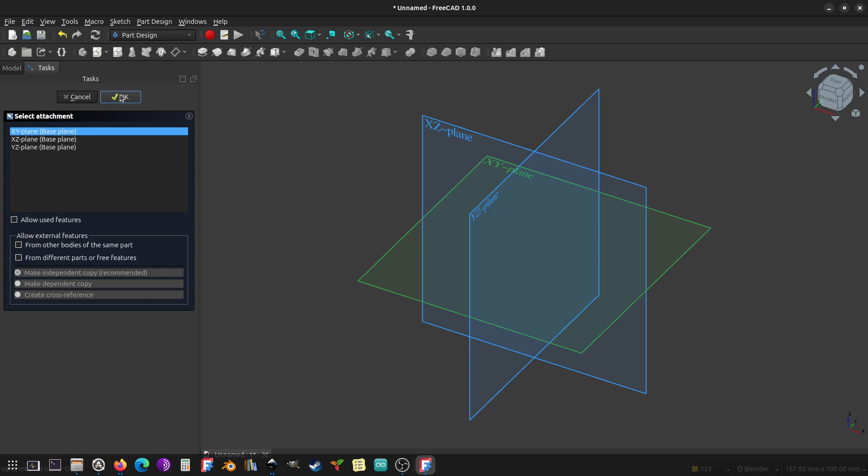In this build along tutorial, we'll be building a bracket for the speed sensor for the SparkBot. After you've got FreeCAD open, begin by creating a new part in the part design workbench. Then in the tasks tab, create a new body, create a sketch, and we're going to do that on the XY plane. Click OK, and we're now in the Sketcher workbench.

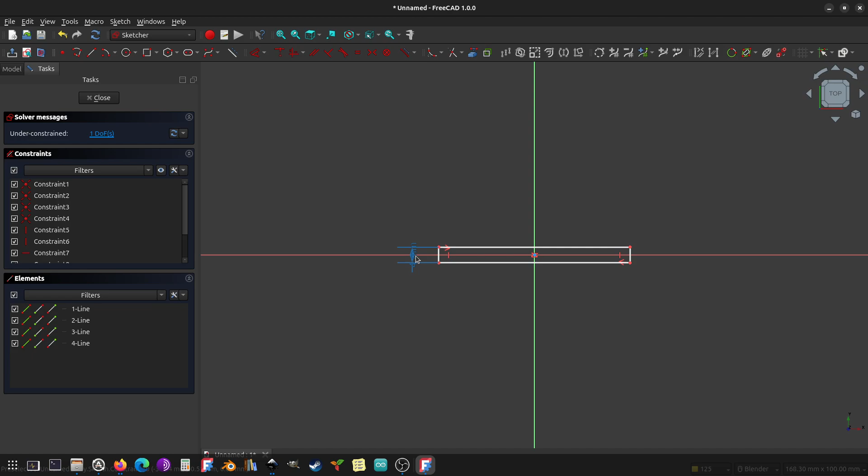We're going to create a new rectangle, and we'll do that symmetric around the origin. We'll do that by clicking on the top left corner of the square, the bottom right hand corner of the square, clicking on the origin, and clicking on the constraint symmetric tool. We're going to make the height of this square 4 millimeters high, and we're going to set the length of this square to 32 millimeters.

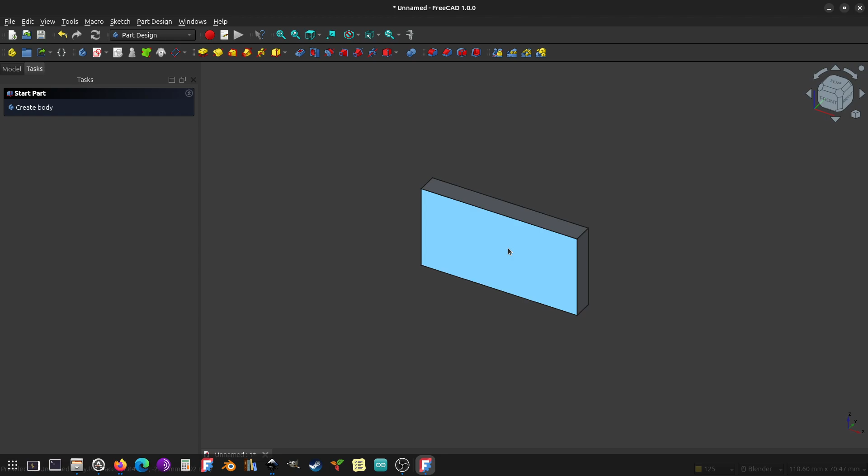Our sketch is fully constrained, so we can close out of the Sketcher workbench. And we're going to pad this sketch out to 17 millimeters. The next thing that we need to do is create a couple of holes for the speed sensor. So we'll do that by clicking on the front face of our block and clicking on Create Sketch. We're going to create 2 holes. So grab the Create Circle tool and just create 2 circles.

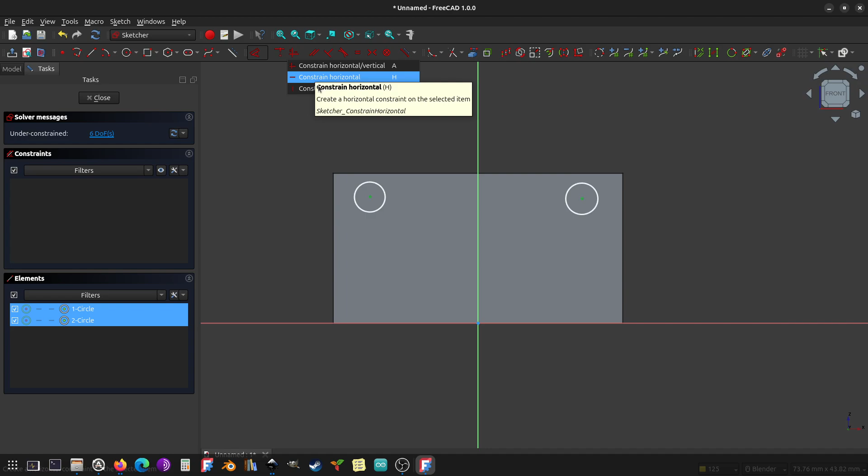And we're going to constrain both of these circles to the same plane. So left click in the center of both circles and come up to the constrain horizontal tool, and now both circles are locked to the same horizontal plane.

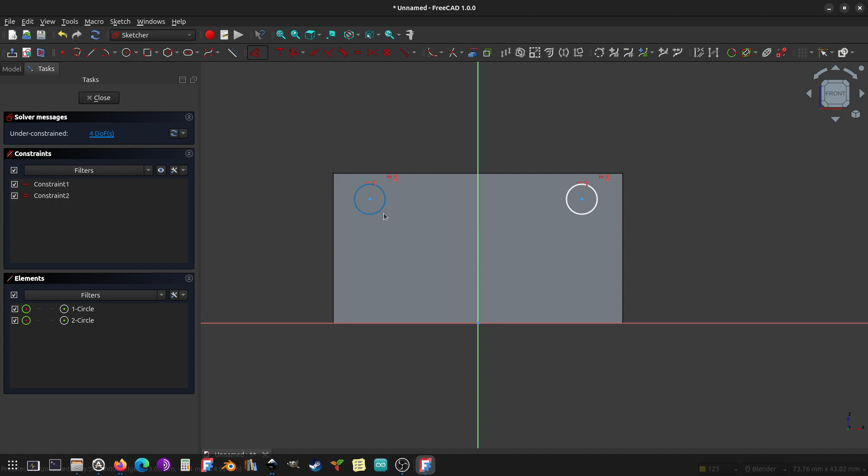We're going to set the diameters of both circles to be equal, so left click on the outside edge of both circles and then click the constrain equal tool, and then left click on one of the circles, and we're going to constrain the diameter to 3.2 millimeters. We're using 3 millimeter bolts to hold the speed sensor onto this bracket, and so 3.2 millimeters gives clearance for the threads on this bolt.

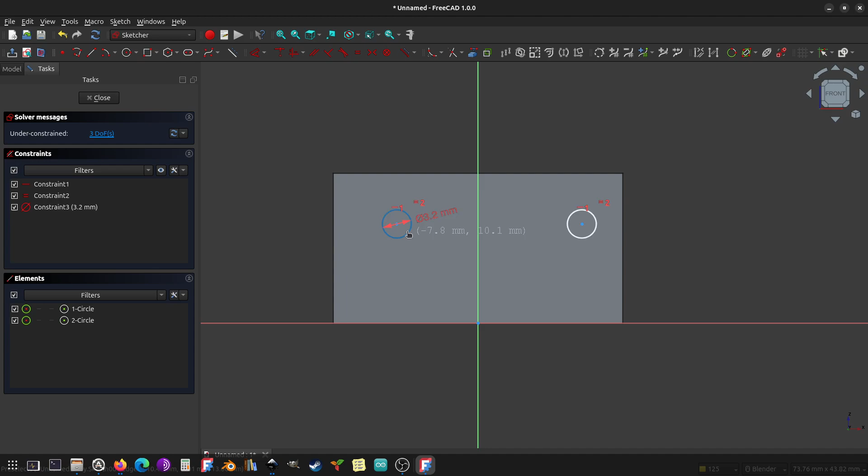We need to lock these circles into place on this block. Before we do that, though, we do need to set the distance between these circles. So we're going to left click in the center of both circles, and then we will constrain the horizontal distance between them to 21 millimeters.

And now we're going to lock these circles into place with respect to the top edge of this block. So we're going to use the Create External Geometry tool, and we're going to click on the top edge of this block. This gives us a line segment that we can reference now. Left click in the center of the left circle, left click on the edge of the line segment, and we're going to constrain the horizontal distance to 5.5 millimeters.

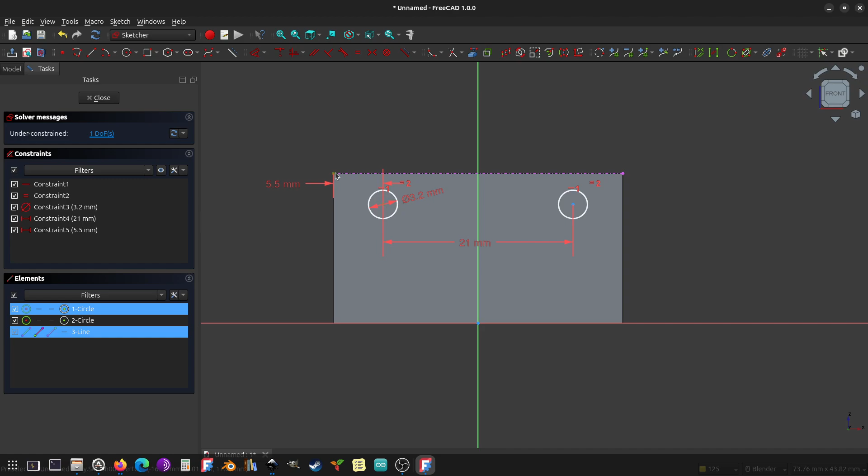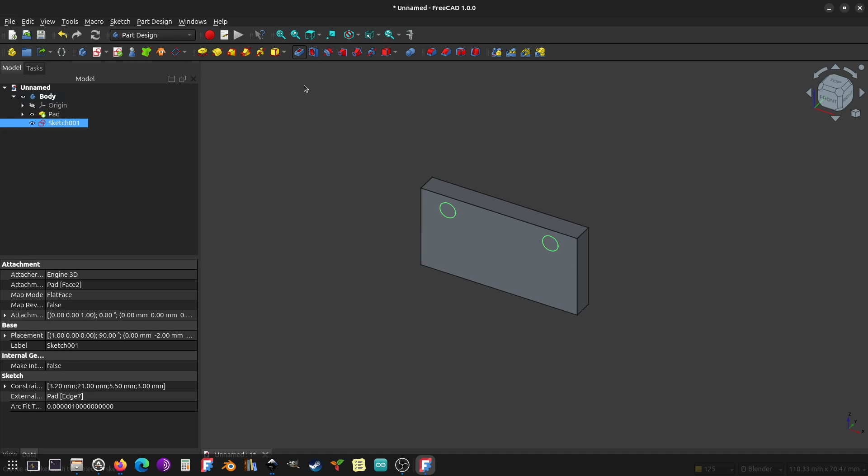And we're going to constrain the distance from the center of the circle to the top of the block by left clicking in the center and left clicking the end of the line segment. We will set that distance to 3 millimeters. So now that our sketch is fully constrained, we can close out of the Sketcher workbench. We are going to create pockets, so make sure that you're clicked on that sketch. Create pocket. It's a 4 millimeter thick part, so 5 millimeters clears the part, no problem.

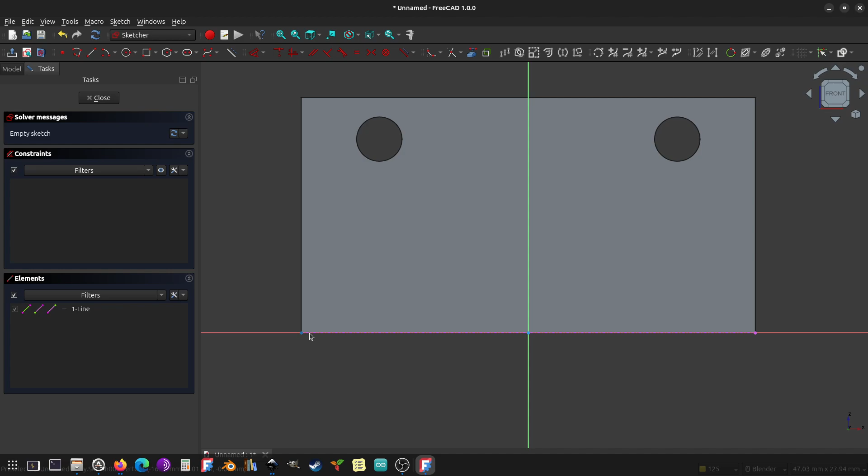And the next thing that we're going to do is create a step on the front of our block. So left click on the front face and click on Create Sketch. Now that we're back in the Sketcher workbench, we're going to reference the bottom edge of this block. So grab the External Geometry Reference tool, click the bottom edge of the block, and you will see when you hover over it, this dotted line indicating that we've referenced the bottom edge.

Now I'm going to grab the Create Rectangle tool, and I'm just going to drag out a rectangle at the bottom. I'm going to constrain this rectangle so that it is linked to the bottom edge of this block. So I'm going to click in the bottom left-hand corner of the square, click on the left-hand edge of that line segment, and I will constrain coincident there.

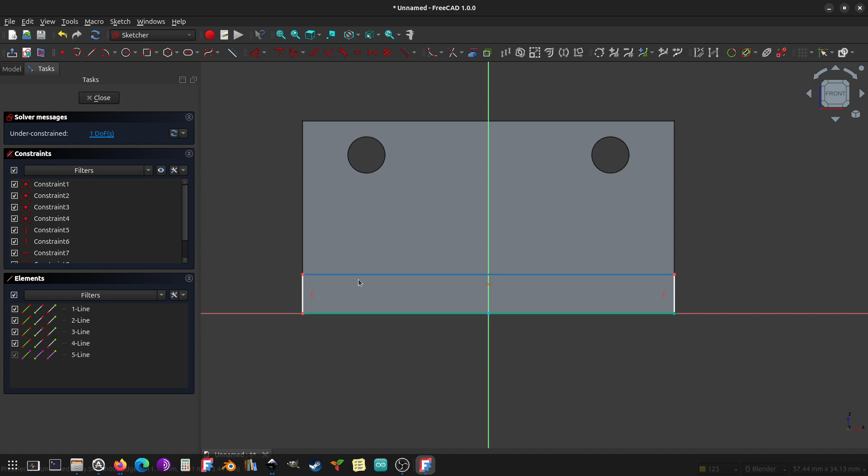And similarly, on the bottom right-hand corner of the square, I'll select that vertex, I'll click on the right-hand edge of that line segment, and I'll constrain coincident. So now our rectangle is locked to the bottom of our block. And the last thing that we're going to do is set the height of this rectangle to 8 millimeters.

We're fully constrained, so we can close out of the Sketcher workbench. Let's pad this sketch out to 6 millimeters. And now we're going to add some cosmetic touches to this block. I'm going to fillet the top edge of the block and the edge of the step that we just created.

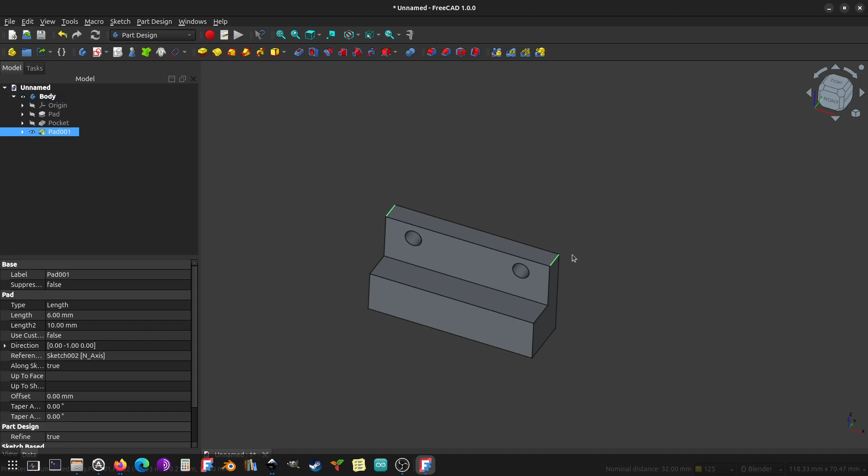Start with the top edge of the block. So click on that left edge there, hold down the control key on your keyboard, left click on the right edge. You now have two edges selected, and we're going to grab the fillet tool and we'll give it a 4mm fillet. We're going to do the same thing with the bottom edge of the step here. So left click on that bottom edge there, hold down the control key, left click on the right edge, and we'll fillet it with a 4mm fillet.

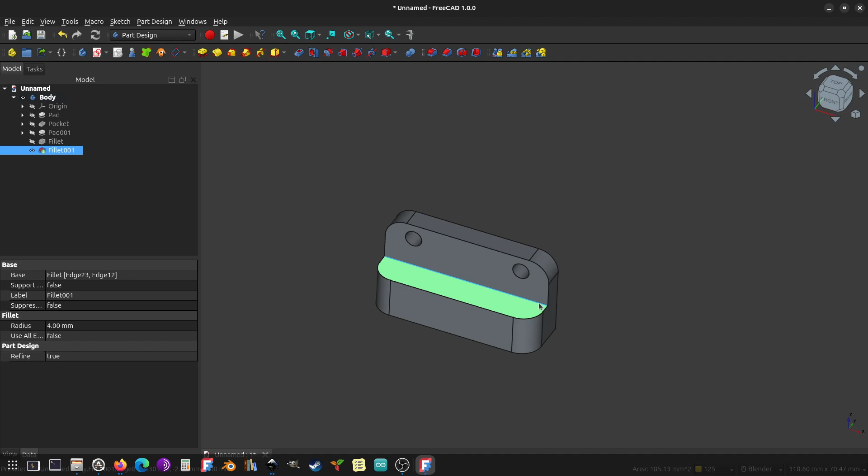Okay, now we need to create two through holes on this step so that the bracket can be screwed down to the SparkBot base platform. So we're going to click on the top of that step and we're going to create a new sketch. And we're going to reference the bottom edge of the step here in this view. So grab the external geometry reference tool, click on that bottom edge, and you will get that referenced line segment.

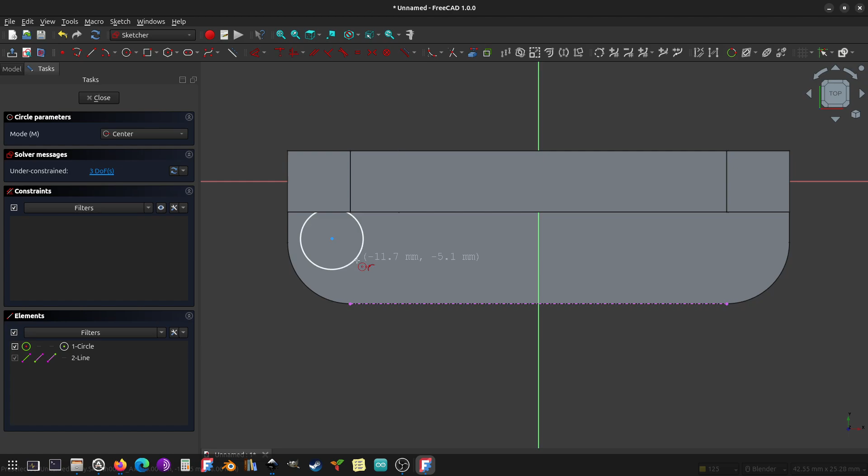We're going to create two holes. So create two circles. As we've done previously, we're going to click in the center of both these circles and we're going to constrain them to the same horizontal plane, so they both move in tandem. And this time we're not going to set a distance between these two circles because it's relatively arbitrary. So we're going to actually link these circles to this line segment we just referenced.

Left click in the center of the left circle, left click on the left end of that line segment, and we are going to constrain them vertically here, and we'll do the same thing. Left click in the center of that circle, left click on the right edge of our line segment, and we will constrain that vertically. So now both these circles are locked to the ends of the line segment here.

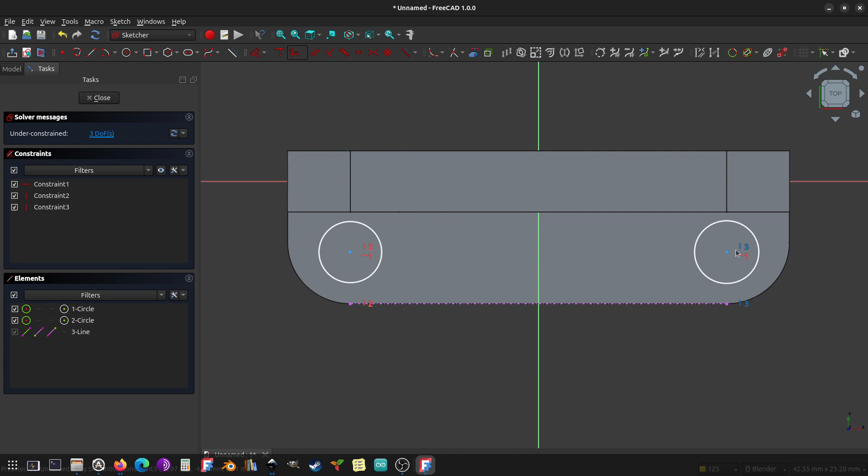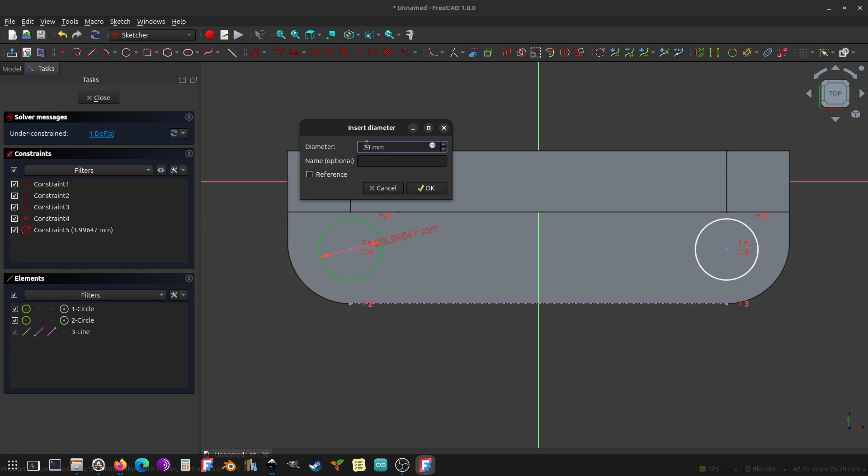The second to last thing, we haven't yet set the diameter of the circles here. So let's make sure that the two circles are set to be equal to each other, and we will now select one of the circles, this left-hand circle, and we will constrain its diameter to 2.8mm. We're using 3mm screws, so 2.8mm holes will allow the threads of the screw to bite into the side of the hole.

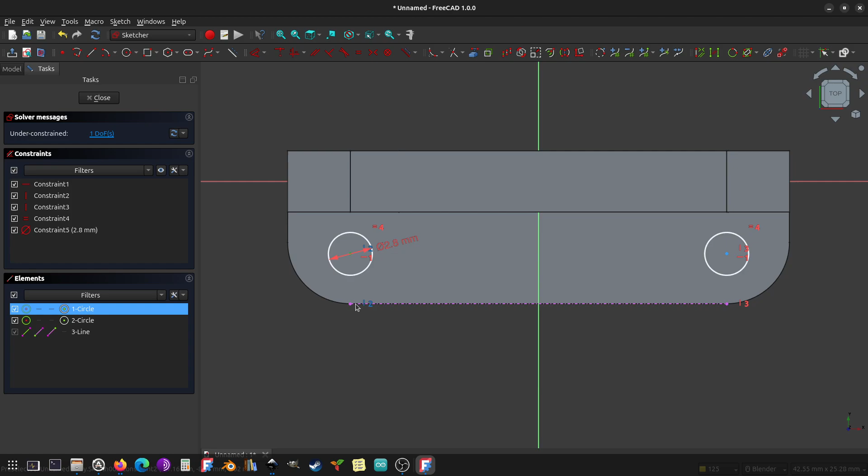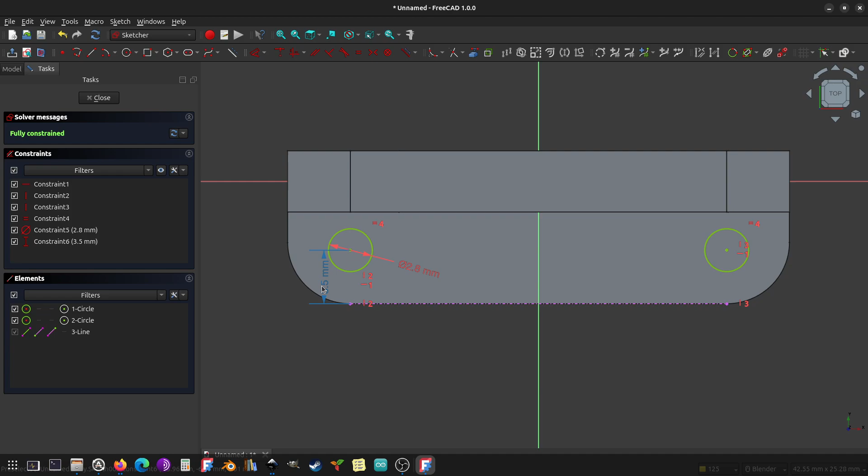And now we need to lock the position of this hole with respect to our bottom edge here. So I'm going to left click in the center of that circle. I'm going to left click on the left hand edge of that line segment, and I will constrain the vertical distance to 3.5mm. And I didn't quite get that right. Let's try that again. 3.5mm. All right. So now we have the circles fully constrained, and we can close out of the Sketcher workbench.

And we're going to pocket these holes so they go all the way through the step. And so that is an 8mm height. So set our length to 8mm and confirm, yes, we have cleared through the step.

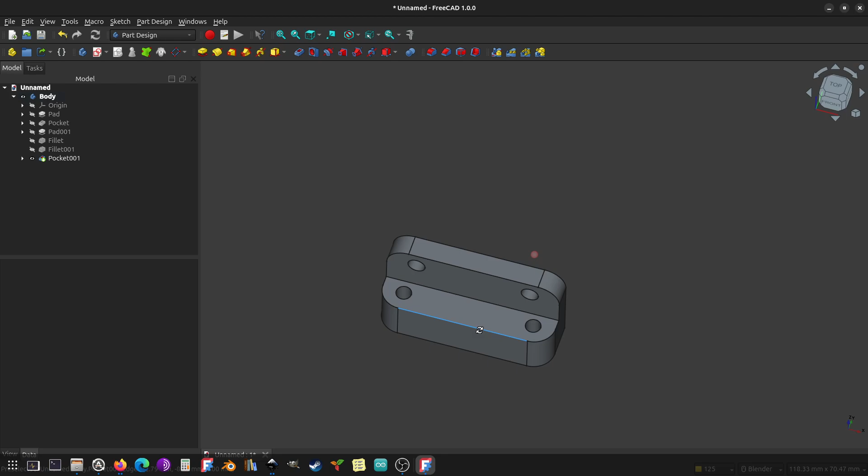And the next thing that we need to do is on the other side of this bracket, we have to create a little clearance pocket so that the pins on the outside of the speed sensor circuit board will not press up against the plastic edge and make it so that the speed sensor is not sitting perpendicular or square to the speed sensor disc.

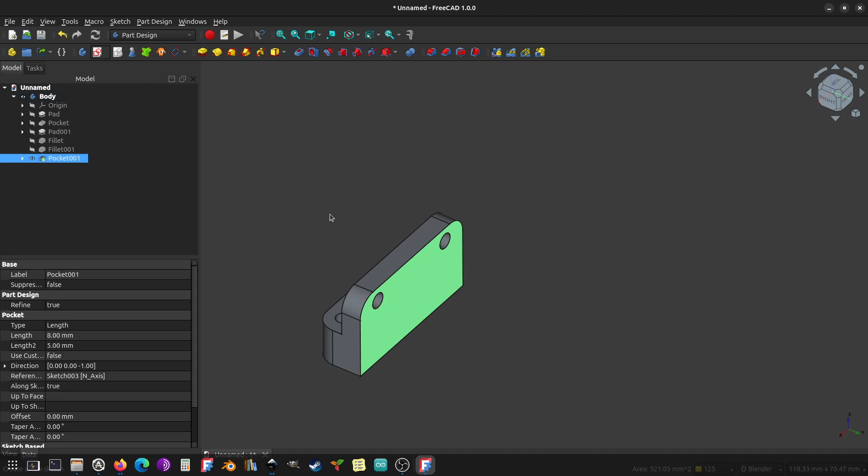So we're going to click on this backside face here, and we'll create a new sketch. And we're going to reference two edges here. We're going to reference the top edge and the side edge. And we're going to create a rectangle here. And we're going to lock the top edge of the rectangle to the top edge of our block. So left click on that top left corner, left click on the line segment, and click on Constrain Coincident.

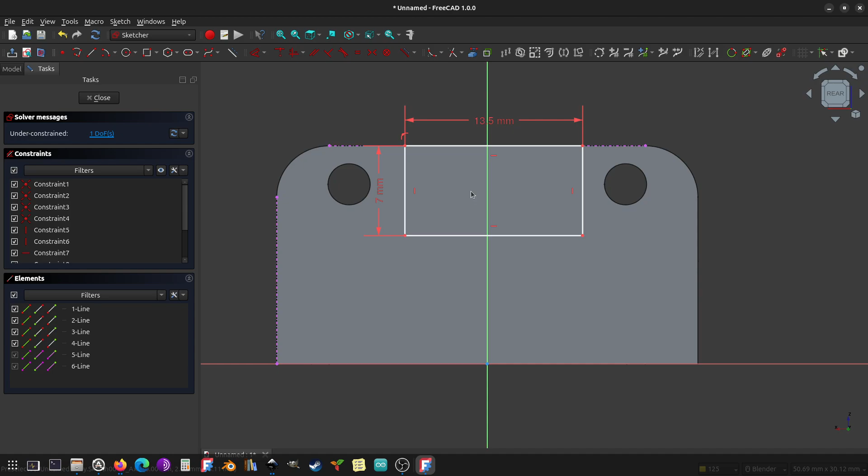And we're going to set the width of this pocket that we're making to 13.5mm. And we're going to set the height of this pocket to 7mm. And we're going to make sure that this pocket is in the center. Now we could just reference the z-axis because the z-axis is sitting right here in the middle, but we're going to reference this side edge here.

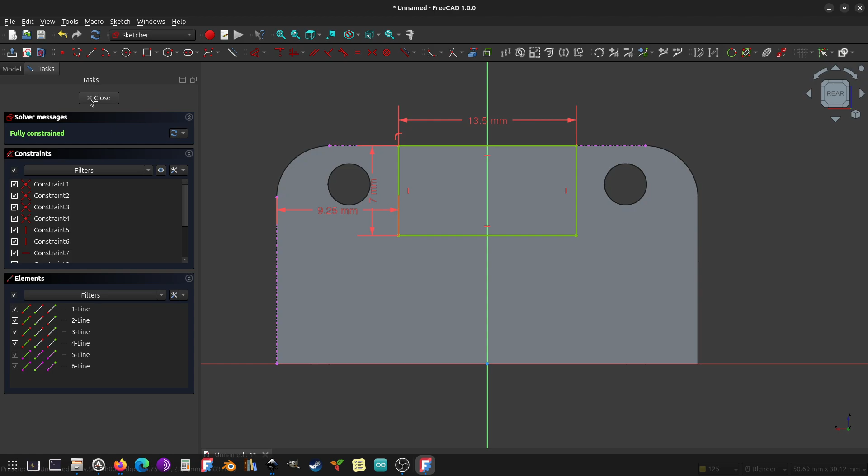And we'll do that by clicking the bottom left-hand corner of our square, and we'll click on the top edge of this line segment on the left-hand side, and we're going to constrain the horizontal distance there to 9.25 millimeters. And now our sketch is fully constrained, so we can close out of the Sketcher workbench, and we're going to set the pocket on this one to 2.3 millimeters, and that's a deep enough pocket to clear the backside pins on the speed sensor. So we're done now, and we can move on.